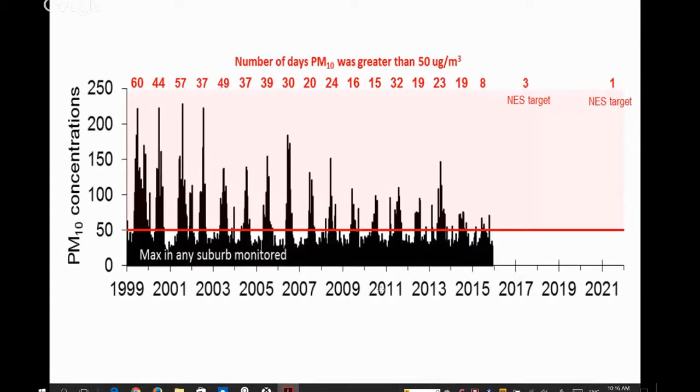There was a time when if you had a wood burner, the goal was to basically keep it burning 24 hours a day. So at night time you would load it up and shut it down to a virtual smolder, and you'd have these plumes of smoke exiting. The low emission burners essentially eliminated that option of the smolder, and they also introduced some technology to help clean that up, by increasing the combustion temperatures.

Low emission burners, as you saw in the graph, have been really successful in reducing PM10 concentrations, but LEBs are still subject to misuse and abuse by consumers. That's something important that the industry has been promoting - education for both the wood side and also the use. That's been embraced quite successfully by Nelson Regional Council and Environment Canterbury.

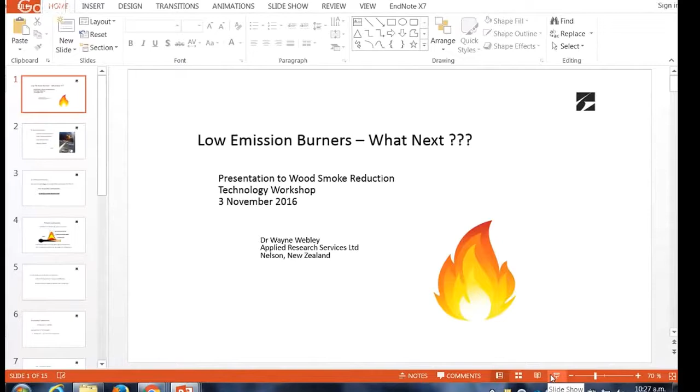I wasn't entirely sure how to pitch this or where to pitch it, so I've come up with some ideas which are hopefully provocative and informative about where you might go from where we are now with low emissions burners, if you lived in an ideal world.

Sorry, sir. Oh, okay. Thank you.

So I wanted to think about what an ideal wood burner would look like. What would we really be aiming for? It would be really great if there were no particulate emissions. Obviously, if you burn wood, it's going to emit carbon dioxide, water vapour, and hopefully nothing else.

My thought really is that there's no real reason why you can't produce a wood burner with no particulate emissions. It would be really nice if it had 100% efficiency - every bit of energy from the wood could actually be used to heat the room.

It would be nice if it produced a really even temperature. You put on an electric heater, you just get a nice even heat. If you put on a gas heater, you get a nice even heat. With most wood burners, you put a load of wood on the fire, and the room gets hotter and hotter, and then it cools off as that load goes away, so the heat goes up and down.

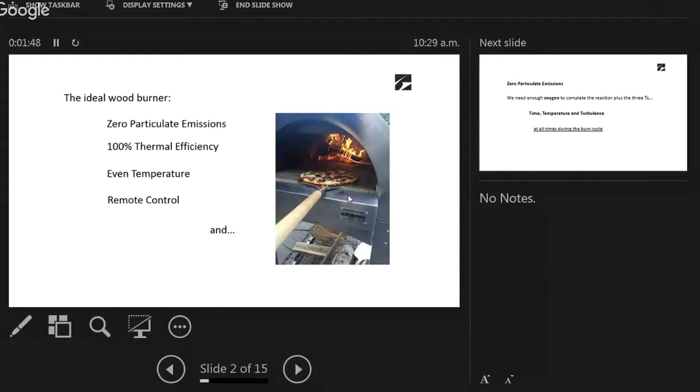I wanted to talk a little bit about the underlying theory of wood burners and how that might inform how we might approach actually producing an ideal wood burner.

So I started off with zero particulate emissions. We're thinking now about what do we need to drive the combustion to completion so that there's nothing left in those flue gases except carbon dioxide and water.

It's pretty simple. In a lot of ways, this stuff is not rocket science. You need enough oxygen. Basically, you're combining fuel with oxygen to produce carbon dioxide and water.

And you need the 3 T's. You need enough time for the reactions to go to completion. The higher the temperature, the faster the reactions go. And you need enough mixing and turbulence so that the fuel gases and the oxygen are well mixed. With those things, you can drive the reaction to completion and have zero particulates in what's going up the flue.

One of the key things, though, is that has to happen right throughout the burn cycle. So one of the problems with a lot of burners, for example at startup, or when you reload fuel, the firebox gets cold, things get out of kilter, and you suddenly produce lots of emissions.

So a lot of burners have an optimum or a sweet spot, and when they're operating there, everything's pretty good. But if you're away from that for any reason, if your operator does something bad, you suddenly start to produce emissions. So your ideal burner basically is able to have ideal conditions all the time.

So let's just think very quickly about wood combustion. I've basically divided it into what I've called primary combustion and secondary combustion. The terminology changes a little bit depending on where you're reading, so I'll talk about what that means.

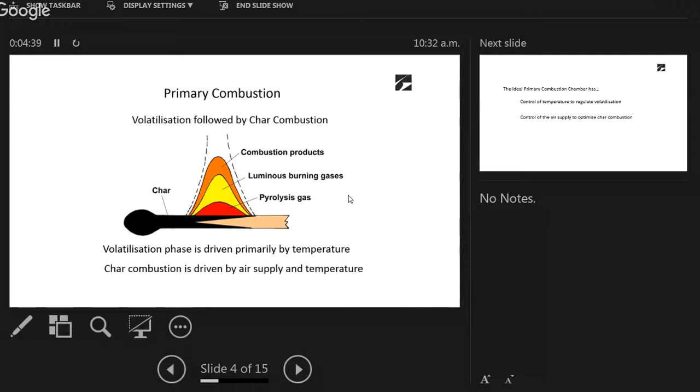So in order to get the volatilization under control, you need to be able to control the temperature in that primary combustion zone. When the volatilization is complete, you need to be able to control the temperature and deliver enough air to keep that glowing combustion of the char. If you don't, you start to produce carbon monoxide rather than carbon dioxide. You don't really want that either.

So basically, just to reiterate, you want to be able to control the temperature in the primary combustion area and the oxygen. The key thing about this in the ideal burner is you're controlling 2 things: temperature and oxygen. And that tells you a lot about what that ideal burner needs to look like.

So the secondary combustion is what happens to the combustible gases. They're just a complete hodgepodge of nasty chemicals that come off the wood into that secondary zone. And the secondary combustion is the process of burning those completely so there's nothing left.

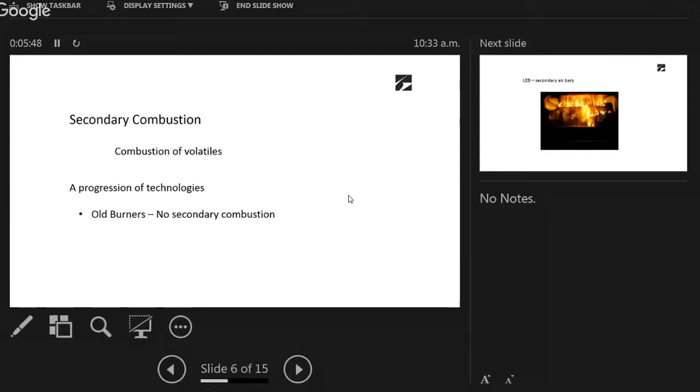I just wanted to talk a little bit about the technologies over the years. Essentially with the really old burners, there was no added technology to drive that secondary combustion. There was some flaming combustion that was really just driven by the heat from the embers, and a little bit of oxygen that came on the top. But a lot of the unburnt gases spilled over the top into the flues, and you got quite a lot of pollution. So the LEBs, the low emissions burners, basically the technology was to introduce air bars or secondary air, and you can see that in this picture.

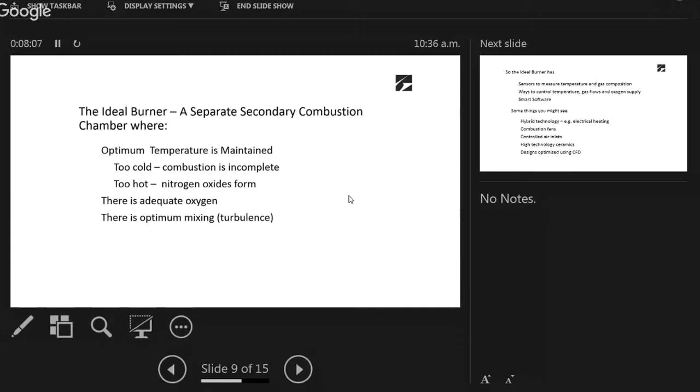So in the ideal burner, we'd have the secondary combustion chamber, but we'd have it held at an optimum temperature. If it's too cold, there isn't enough temperature there to drive the combustion to completion. But if it's too hot, you start to form nitrogen oxides and you create a whole lot of additional problems. So we don't want it too hot either. There's got to be adequate oxygen in there, and there's got to be optimum mixing. There's got to be really good turbulence.

So this kind of points to where the technology might head. And this is just my view. As I said, it's a little bit provocative.

I think we're looking at burners where there is really good sensor technology to measure what's going on, measuring the temperature and the gas composition. There are ways to actually control those things, some way to actually control the temperature, and that might be feeding some of the heat back, or it might be an additional heat source, like some electrical heating or some gas heating. I know people hate that concept, but I actually think that's not a bad way to go. And linking those sensors and the control of the air and the temperature is going to be some smart software. I think that opens up just a whole range of really nice things that we really should be doing with wood burners. Some things you might see: hybrid technology like wood plus electricity or wood plus gas.

You're likely to see combustion fans. So the difference, some heaters have fans now, but they just drive the air circulation around the outside of the firebox. A combustion fan is actually in the combustion path, controlling the flow of gases. Some controls on the air inlets to direct air to different places at different times. The use of high technology ceramics. And I think the designs of those combustion chambers would be optimized using things like computational fluid dynamics. So there's some potential there for some really nice research.

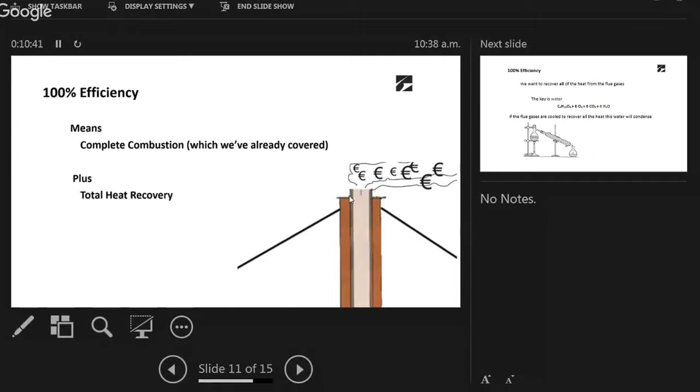If we're going to bring the temperature of those flue gases right down to ambient, the key is water. I want to talk briefly about where that water comes from. We know there's some moisture in the wood we burn, 16 to 20% moisture, and that comes from the sap. But it's also important to realise that the combustion process, the combustion of cellulosic materials combining with oxygen in the air, also produces water as a function of combustion. So there's two types of water there.

As you cool those flue gases down, that water is going to condense. It's just like the laboratory experiment you probably did at school, where you boiled something off, ran it through a condenser, cooled it down, and got droplets of water. So one reason people don't do this at the moment is because they have to deal with water in the flue if they cool the flue gases too much.

The other thing is that the heat in the flue gases creates a draft — it's actually what pulls the gases through the combustion system. So in the ideal heater, we have a condensing system. It's going to deal with the condensed water, and it's going to involve some kind of heat exchanger to pull that heat out. It might be a water coil or an air coil, but we're going to pull out that energy.

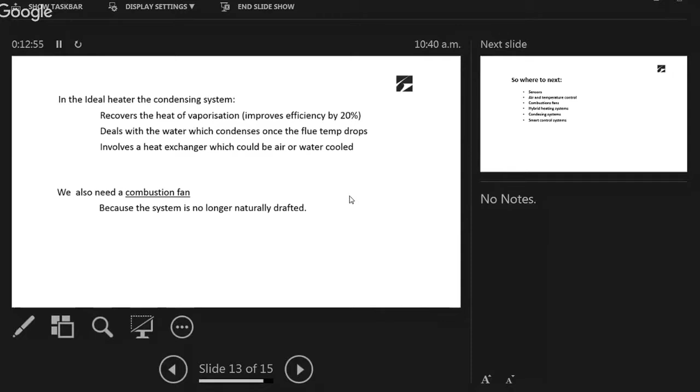These are done overseas on large-scale boiler systems. They're standard — there's no reason why we can't apply them, particularly to low emissions burners. And as I've already mentioned, if you don't have a flue draft from the temperature, you're going to have to put a combustion fan in there.

Okay, so just really quickly, if we're going to improve things, here are some of the things I think we need to put into place. We're going to have sensors. We're going to have control of temperatures, probably using some kind of hybrid heating. We're going to have control of air using air controls. We're going to have combustion fans. We're going to have condensing systems, and some kind of smart control that looks after the whole thing. And there are some other benefits of smart control.

If you're actually controlling the combustion process, suddenly you can make sure the heat is even. You can do what most heaters do, and that's sense the room temperature and control the output. So you can decide what temperature you want in the room, your smart control will deliver that, and you can have your remote control.

You might also see some automatic ignition systems. Wouldn't it be nice if you're heading home and you could push a button on your cell phone and the fire would be lit? You'd come home, everything would be nice and warm. Pretty much like I can do with my heat pump — I can turn it on before I leave Auckland, so the house is warm by the time I arrive back in Nelson.

You'll see web interfaces and smartphone apps. There's just a whole lot of cool things that you can do, as well as getting 100% efficiency and really clean burning.

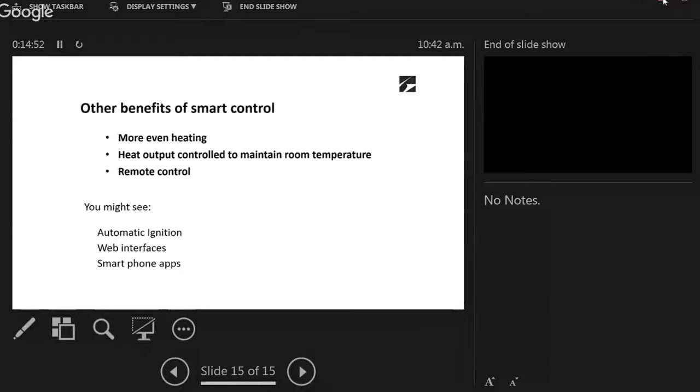I'm very happy to say that the technology generally does seem to be working, because we're getting quite a lot of online questions, which we'll come back to later on. But for now, let me make sure — have I got the right one? That's the right one, isn't it?

Why is that not coming up? Why is that not responding? That should work. Oh, it's just not coming up on there. Mysteries of technology. Technology, you see. Yes. Sorry.

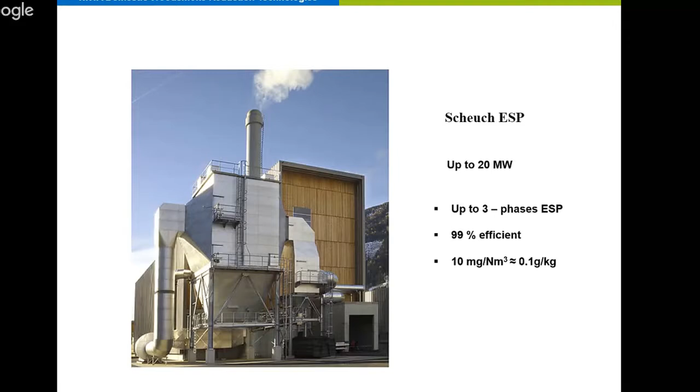My topic is electrostatic filters. Electrostatic filters is a technology which has been around for years and years for big plants, not small plants, like 20 megawatts.

But we want to talk about OekoTubes. That has been developed by a Swiss startup company in 2008. They started with that appliance, which can be retrofitted on every single tube, in every single location, even concrete or whatever, and takes the emissions out.

The results come with it - I want to show you some pictures. These guys now have 20 people involved, and 5 of them are only working on new technology, which is going to be here for the next 10 years. I can't tell you everything because some of it is pretty secret - that's what they're doing too.

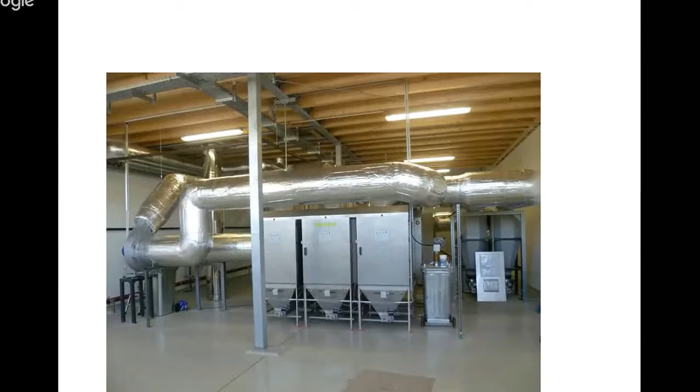But we're talking about OekoTubes. OekoTube - that's my house where I live. I put an OekoTube in. I have an old campfire from about 3 years ago, and I put that one up to get the things out. How does that work?

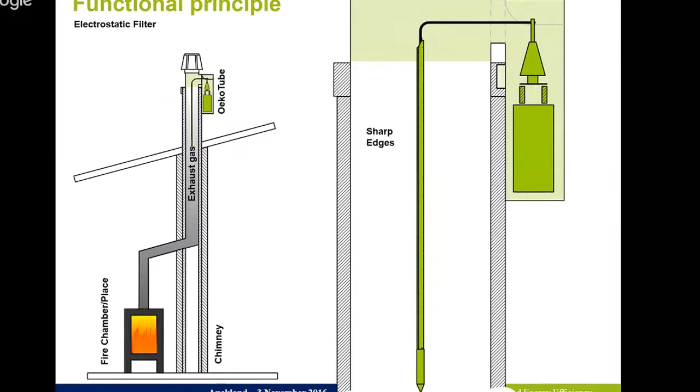Maybe you're familiar or not familiar with electrostatic filter things. You have a chimney here, the OekoTube is up here. You put an electrode - I brought something with me, it's an electrode - and then you have the tube as such. That's the high voltage, which we actually transfer from 240 volts, 30 volts, up to 30,000 volts.

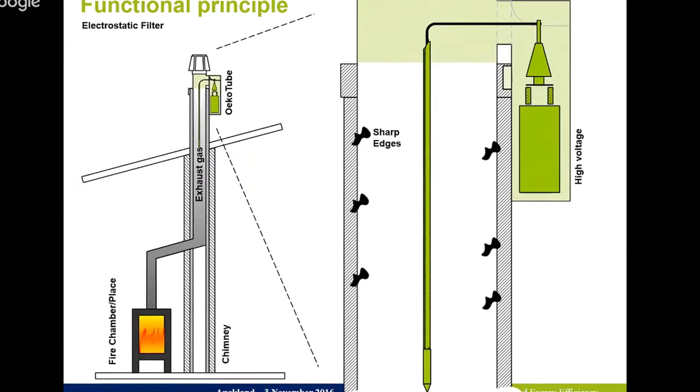Pictures say a lot. First I have some pictures and some tests which have been done in New Zealand when we were first involved, as well as international tests. And maybe if you have time, we can go through a cost-benefit analysis which shows the health benefit of cleaning up the air.

Well, that's a clean chimney - just keep that in mind, clean chimney. As you can see up here, that's the electrode. This goes down the center of the chimney, and then we create this electrostatic field. Just keep that in mind.

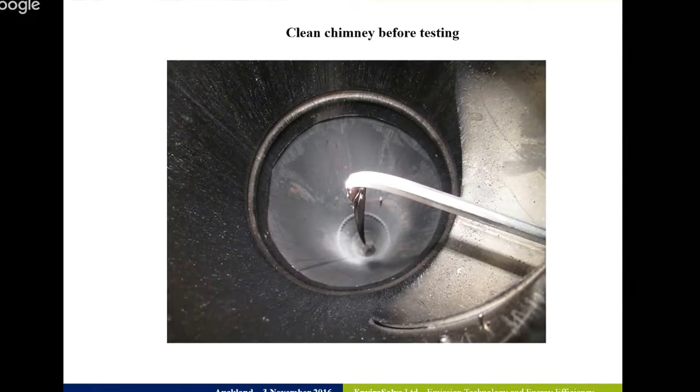The next one is a test we've done in Auckland, where I burned 22 kilos of fuel with no electrostatic filter. That's all the dust you get after 22 kilos.

Here, I put his finger there—it's a very, very thin layer. That's all it is after 22 kilos burning. And that could start hot burn, and thing as well.

Next one, that picture I took 14 minutes after start, and we burned 1.5 kilo of wood. You can see here all the dust already there, the dust which is so small. After that small little thing, we have about 2 mil dust already there. After 1.5 kilo, that's what it takes out.

Another one after 2 ¼ hours, and you can see here, that's very important as well. You can see here small little crevasses in there, which is what's happened. Some of that dust which already collected either went fall down or went up in the air, which is called re-entrainment, and they are big chunks—I'll show you afterwards.

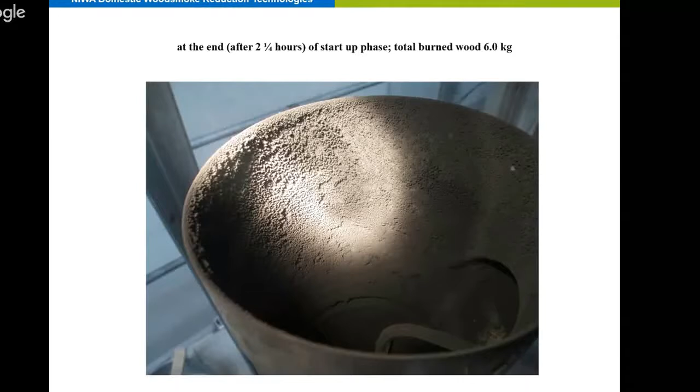That's one after 14 kilos. 14 kilos, that's the dust which we collect after 14 kilos. I put it up here at 1.6 meters. You see how much dust is there. It speaks for itself.

That's the re-entrainment, what they call it. We talked about these clumps, these small little flakes which can go up. The faster the velocities, the more of these big chunks go up into the air. But because they're so big, they don't affect your health, and they fall down roughly about a meter from the chimney. It's carbon, that's what's going there.

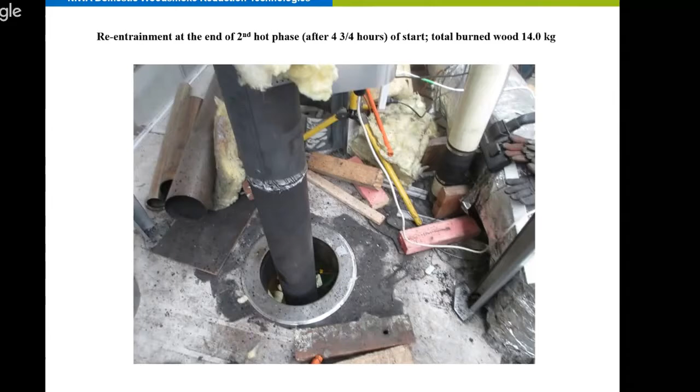That's when we finished, and you can see here all that big chunk, it fell down when the person down there shut the door to reload. All of a sudden, everything went down back in the box.

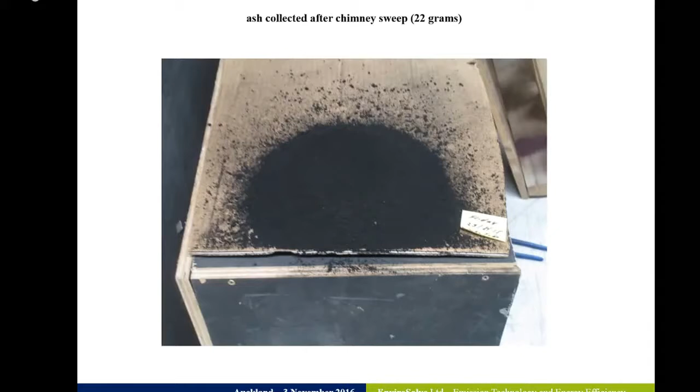That's the amount that he took out after finished, 22 grams. Now that's just to show you how much it is. That's not scientific or whatever—it's just to observe what's in the chimney we put out. That's nothing we can quantify.

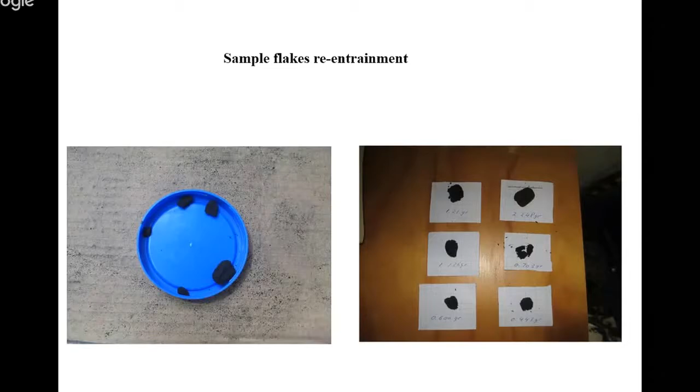That's the big chunk, shows the big chunk which came up here. The biggest one was 2.2 grams out of these nanometers, small little particles.

Testing, that's a big problem. When we do testing with the tunnel dilution method, some of these flakes go up, get sucked into the tunnel dilution and hit the filter, and then afterwards you weigh the filter, and your test result is absolutely gone out. You cannot actually say yes or no, and you will see that in the results what they have done—you can see negative actually efficiency. That's what's happened, and it's pretty big.

That's about one day—I put the thing here, that's about 2 mil high, and all in the middle it's sparked with this filter. And when they hit that filter, they get weighed, they spread around, and they get weighed afterwards. The result is that we have a negative result, which suggests it produces dust, which it doesn't.

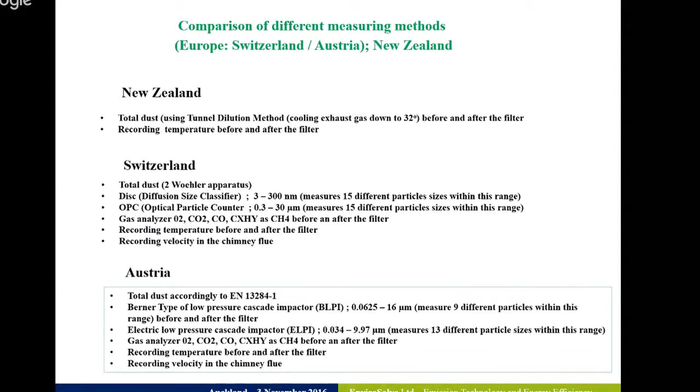When we talk about method, we have different methods in New Zealand. We have a tunnel dilution method, as Wayne knows. Switzerland have different methods to Austria, but the big difference—I'm not going through everything—is that the Swiss and Austrian people count particles in different ranges and different sizes. They do that with different methods, and that's a big difference. They don't only count one—you can see some of the discs have 15 different ranges, so you know exactly how big they are.

Now, what they've done so far—we started with Wayne back in 2014 with a big 28 kilowatt multi-fuel burner from Reefton, the main outlet from Reefton. He fueled it up and we measured. That was not really scientific, we just started and we see what's happening. And that was happening—that's your result.

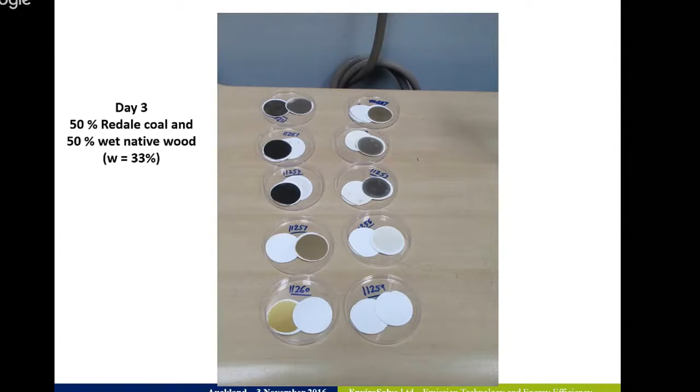We were approached by the West Coast Regional Council in the South Island, and I was concerned that when we put up these electrostatic filters, we'd get blockage because so much dust comes out. We monitored every 2 weeks, went up there, took pictures, measured the side to see how much dust was on the wall, because in Reefton they run big multi-fuel burners 24 hours non-stop for about 120 days, and I was really concerned it would clog.

But to my surprise, it doesn't block, it actually cleans itself. Everything falls down, but because they're real big burners, these big blocks and flakes come out, but they're not harmful anymore. After 6 weeks it looks like in a chimney.

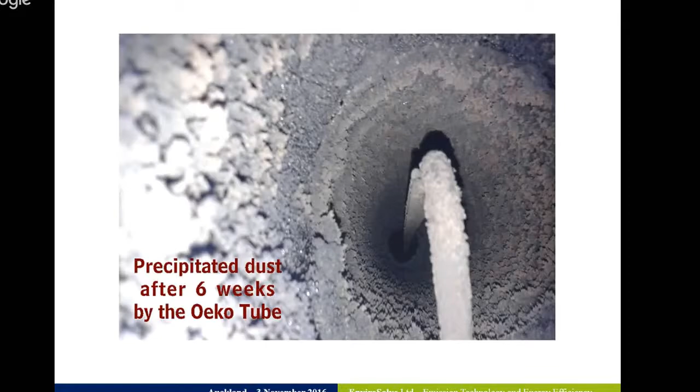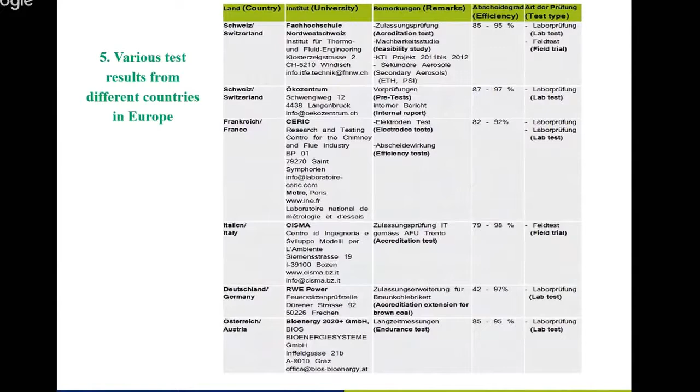There's one study where the Swiss tested the OekoTube for 2,000 hours without cleaning the OekoTube or the chimney. You can see with particles at 300 nanometers, even after 92 days and 2,000 hours, we're still performing well.

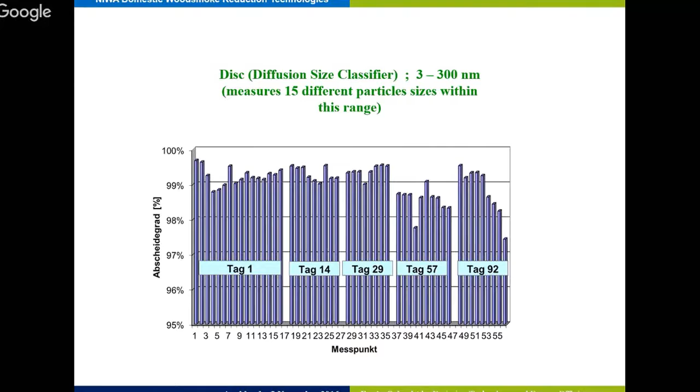They also measured the bigger particles, between 0.3 and 3 microns, and they were a bit lower but still well up in the 80s. That's all measured over 2,000 hours without cleaning.

Then the Austrians wanted more data, so they set up a lab test using pellets instead of wood, so they could control the fuel and what would happen. They took the extremes: high oxygen with low fuel, and really low oxygen.

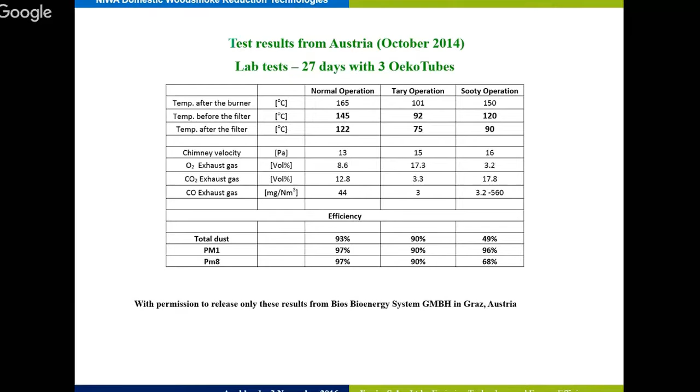They did 27 days of testing with 3 OekoTubes. As you can see, that one and the 49 result come back again to re-entrainment of flakes coming out. We still have really high efficiency, and they measured PM1 and PM8.

That was the first stage, and it took them 2 years to do. The next stage was the following, and this is brand new from the press, really - there's a scientific paper out there, with the whole report in German. They did this to bring it to the field.

They took 3 really old burners and put 1 or 2 OekoTubes on them. The OekoSolve people developed one called OekoTube Inside - it's gas tight and can go into a house. They also built in a way to fully automate cleaning mechanically if you want. It goes up to a 60 kilowatt boiler.

It's pretty amazing, really. They did two things: two seasons, each between 630 and 1,000 hours, and every 10 seconds they collected a full set of data. This was done at a university with all the years, manpower and resources - they just put a PhD student on it, and that's the actual result.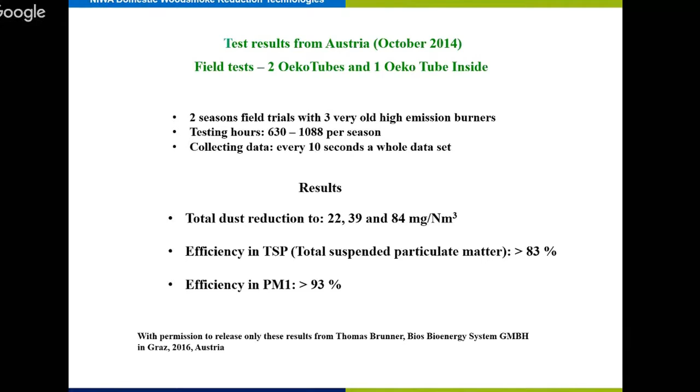Just to finish, because we have lots of air sheds, for the 1st of September 2016 we have a new law in place. Some of the airsheds are not allowed to have more than 3 exceedances. Some of them are really, really over the top, and nothing happened. I'm not sure what these councils are doing next year, because they're going to fail it. I won't talk about other emissions, but that's a discussion we have to have.

I've done a small calculation. This has nothing to do with scientists - I'm not a moralist, I'm not a statistics man. I took some figures together coming from HAPINZ, how much it costs a small town in New Zealand for health and social costs. These figures are from the March 2012 report, not from me.

I try to figure out how an OekoTube is going to affect these figures. I say, okay, we have a yearly cost of $11 million, not my figures. We put that OekoTube on, and only in the first 5 years, we get 5% reduction of health costs - that's not much, just 5%. After 5 years, no more increase or reduction, just leave it as is. At the end, if my figures are right, it's $35 million, and we can spend $4 million.

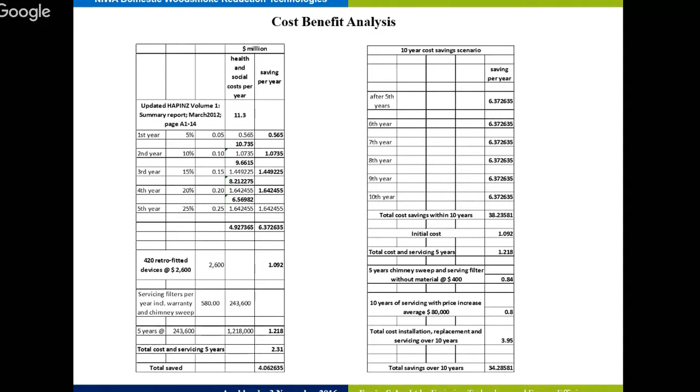Unfortunately, people with the money in hand don't see the real good things coming out of that. Conclusion: put your OekoTube back on. It was very, very efficient.

In Europe, it is mandatory - you have to sweep every year. And you look after the filter for 5 years. If you have this contract in place, we extend the warranty from 2 to 5 years. This OekoTube has a life expectancy of at least 10 years. That doesn't mean we're going to exclude other emission burners or other technology coming to market, but we can react very quickly.

That's about me. Thank you very much for your attention. If you have a question, thank you.

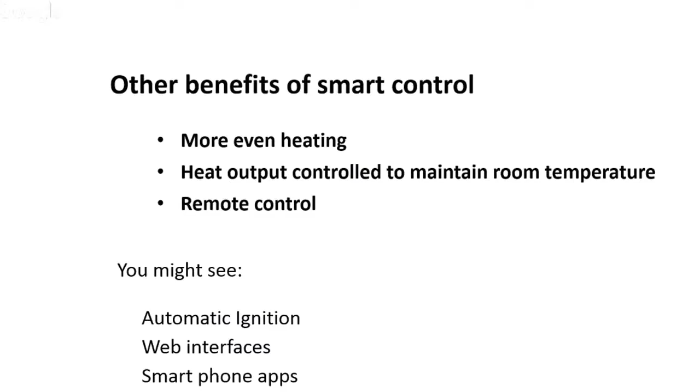Excellent, probably when I look afterwards. Thank you very much, Rene - very good food for thought there. At this point, just to keep to time, we're going to crack on, and I'm going to invite Jeff Blewett, formerly of this parish, now of Golder Associates - let me see if I can find the right one. Which one? That was yours. Have I done the same thing? Usually it's not made it come up on the screen. We're okay? Oh, you're not okay on that screen? You're okay here, okay. You right, Jeff?

Yeah, good morning everyone. Thanks for the invite to the workshop. As Ian alluded to, 5 years ago I left NIWA and went to Golder Associates, and my time at NIWA was very exciting because some of the projects I worked on involved real-life emissions from domestic burners. In my time as a consultant, I've been really fortunate to do a lot of work with ultra-low emission burners. So that's how I've ended up here today.

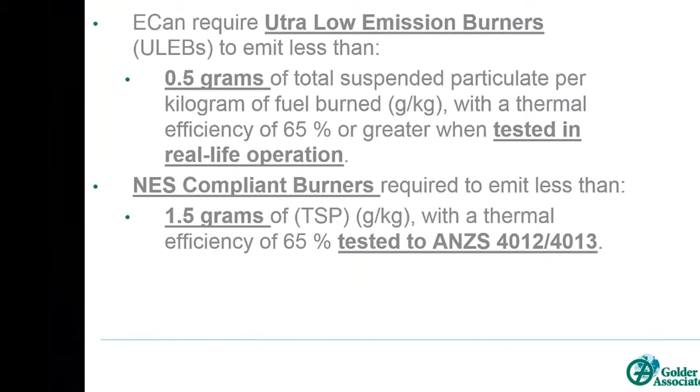So first of all, what is the definition of an ultra-low emission burner? I will apologize here, and I've apologized in our presentation - I didn't coordinate with Wayne, so there's a little overlap between the two of us, please forgive me for that.

So the definition of an ultra-low emission burner is 0.5 grams of TSP per kilogram of wood burned and an efficiency of 65%. That compares to the NES compliant burner, which is 1.5 grams and 65% efficiency. So there's two big differences there - one is the quantum of TSP allowed, the second is the test method that's applied to ULEBs.

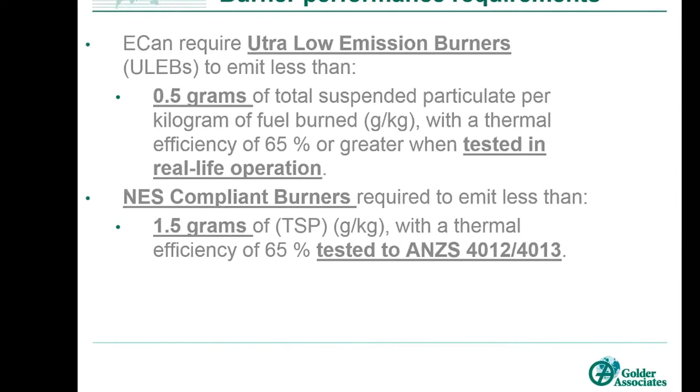I guess this is a Canterbury-centric presentation, because this is the definition that ECAN is using, and I believe it's similar to Nelson, but I'm not sure, because we don't have a national definition of ULEB - that may be coming up, I don't know. Anyway, so that's what a ULEB is. Now, for those of you who are interested, I'm going to do a little bit of combustion chemistry here - apologies to Wayne.

So, for those of you on the internet, what I'm holding in front of me is about a 1.5 kilogram hunk of Pinus radiata. It's a beautiful piece of firewood. Now, my 9-year-old son, who loves toilet humor, would say, what's brown and woody? And the implication is a piece of wood, and this is what this is.

But when I look at this, it's a beautifully engineered source of energy. It's a fuel tank full of volatiles you can burn. Once they've gone, you actually burn the container that contained them. It's just fantastic engineering. So let's put that in the context of the combustion chemistry.

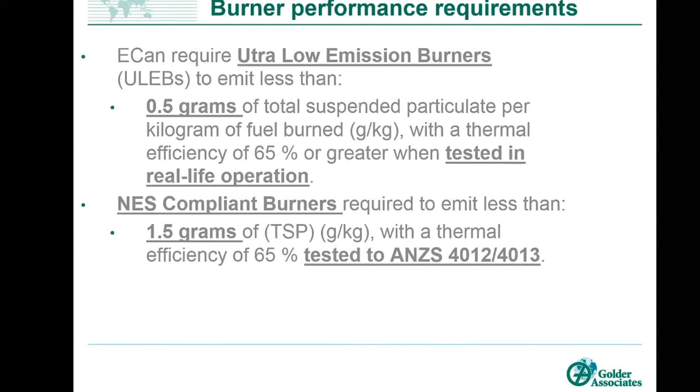Just a 101, there's two little slides here. Taking you through the process, when you light a fire, the first thing you have to do is deal with moisture - there's about 20% moisture in that chunk of wood, and before you can burn it, you want to dry that off. Once that's happened, the heat in the flame dries off the volatiles from the wood, which are burned. Once it's warm enough, the wood begins to decompose thermally, and that means the volatiles are driven off.

What happens next is that at about 280 degrees, it converts from solid to gases. The gases ignite at about 600 degrees. Now, one of the different terms we use here, I call it secondary combustion. Once those gases are released, you're left with the woody charcoal matrix, which is the charcoal. And at the end, when you get some oxygen on that, it begins to burn as well.

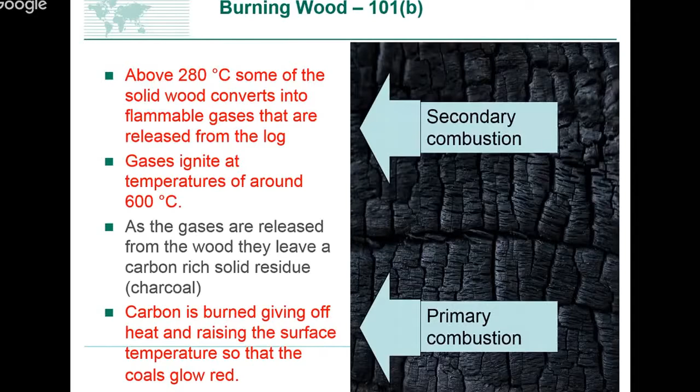So now this is important in the context of ULEBs, because as Richard showed earlier, in the LEBs, that combustion happens in one place. With the ULEBs, the engineers have been clever enough to separate those processes and provide conditions within which those two processes happen much more efficiently. So I've done some work on about five ULEBs.

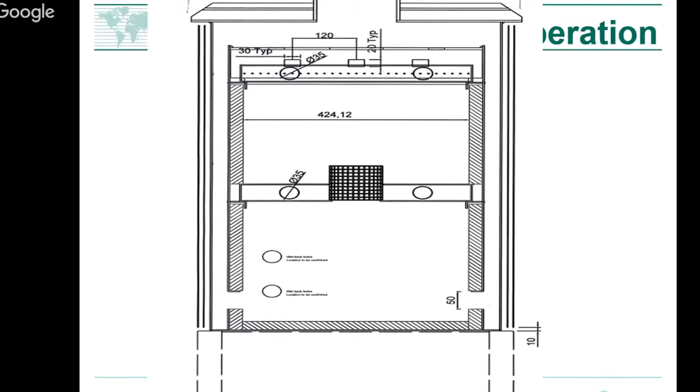It begins to light up and boil away. What happens is the combustion gases escape through that little hole and head up the flue. At this stage, what's happening is that the warm air rising in the flue is pulling air into that primary combustion chamber.

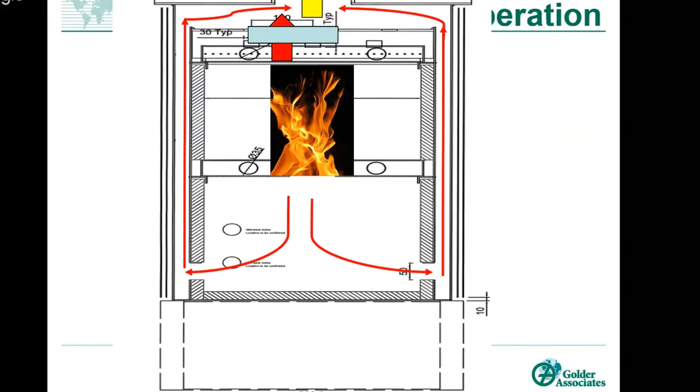Once things get hot enough, with the ULEB, we throw a barrier across the outlets to the primary combustion chamber. At that point, the air is then, due to the pull from the hot air going out the flue, drawn into the secondary combustion chamber, and in this particular model, you can see it go up the sides of the combustion chamber, through the gap at the top, and continue up the flue.

And at this point, what happens is we get that lovely - I love the term - dragon's tongue in the secondary combustion chamber. So that's how a ULEB works, and you're burning the charcoal at the top and the gases at the bottom. The conditions within each of those combustion chambers are designed to optimize, but not perfect, the combustion in the unit.

So here's a picture of a ULEB operating. You can see the interesting things are the color difference between the top chamber and the bottom chamber. The bottom chamber is getting close to 1,000 degrees in those gases. The top chamber is more like 600. You can see the difference between the red glow and the yellow-white light.

This is just a picture showing you the end of the burn cycle. It's interesting to have a look into the bottom chamber and see there's a little bit of ash in that secondary combustion chamber. Generally, instructions say you don't need to open that door to clean it out more than, say, once a month. You can see some normal ash collection at the top.

So the emission testing, now this is a critical difference between LEBs and ULEBs. The NES requirement is to do the Australia New Zealand standard 4013, and that is, as Richard has said before, was simply always intended just as a comparison between burners. It wasn't necessarily meant to reflect real life emissions.

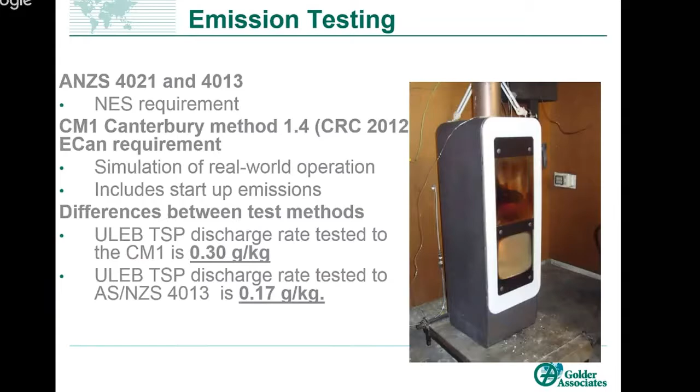So just a little idea, so what does this mean in real life? These calculations are not mine, they're taken directly from some ECAN documents. Essentially what we're showing here is the total daily emissions by type of burner. Clearly this isn't meant to be precise, it's indicative, so please just bear that in mind.

I guess the thing I'd like you to focus on, we've got the standard test method. We do a little adjustment to that to reflect real life conditions. We've got a good approximation about how much wood's used each day, and we end up with a total daily emissions of grams per day. You see that varies from 600 grams in open fires down to 21 grams per pellet burners. The interesting thing there is that I guess just ask you to focus on the complying burners, because they're coming in about 63 grams per day.

Just for anyone interested, I'm at home, I'm in that bottom row. I've got a pellet burner, which is brilliant. I do about 63 steps, and I drag up a 15 kilo bag of pellets every second or third day, depending on what time of winter it is. Great for heat, noisy as heck. Every heating system, you know. My wife says to me, 'Oh, can't you squeeze a ULEB, a discounted ULEB out of Renee?' So who knows, in the future we may have one for one of the other great ULEBs on the market.

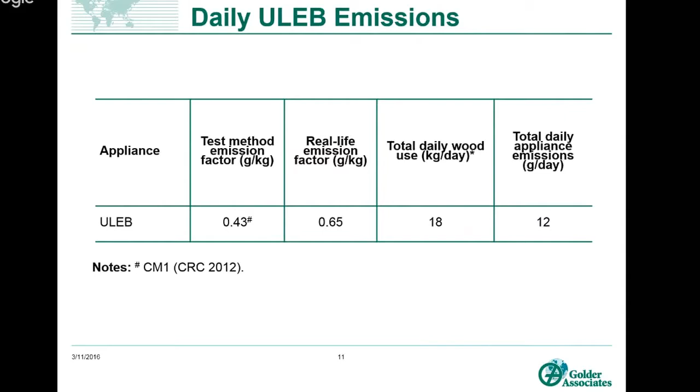Anyway, please just look at that compliant burner, 63 grams per day. We do a similar calculation for ULEB. So the appliance was 0.43 grams under CM1. Now, what we've done just to make it a relative test is we've added a safety factor of 50% to that, so we're using an emission factor of 0.65 and a wood use of about 18 kilograms a day. That gives us about 12 grams per day for the appliance. Now you think back, the compliant burner was 60, so this is a fifth of the amount that an NES compliant burner would use. Now, look, once again, it's not precise, it's indicative. What I'm trying to illustrate is that there is a big step forward here with this technology.

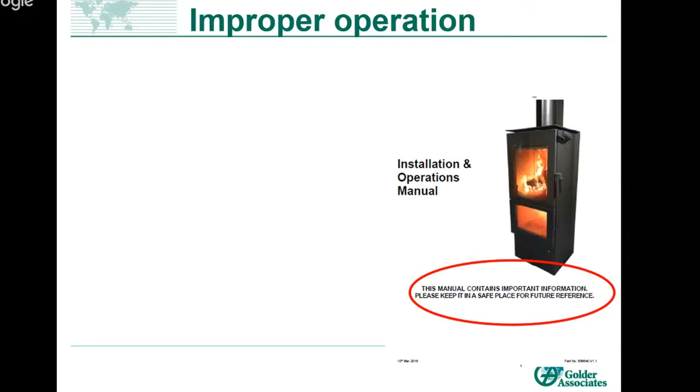Now, there's an issue with this: improper operation. All these ULEBs come with an installation and operations manual, and you'll notice all of them have this is vital information - store it with your passports and birth certificates - but whatever you do, stick to the rules. But what happens is for the ULEB to work, you've got to engage the damper or the bypass, which blocks off the direct route from the primary combustion chamber to the flue.

And it's great looking at these and seeing a variety of engineering solutions towards this. Rene mentioned that the Bionic has an automatic bimetallic strip that closes that for you no matter what you do. There's some cam action door drives, so when your door closes, the door, that goes across.

Other manufacturers have put a temperature gauge on the flues, and the instructions say when you get to this temperature, close the thing. There's a red, green, white LED on one model that says when it's green, close the door. And there's one that says just watch your watch, and after this much time, close it. So what happens if you don't close that thing?

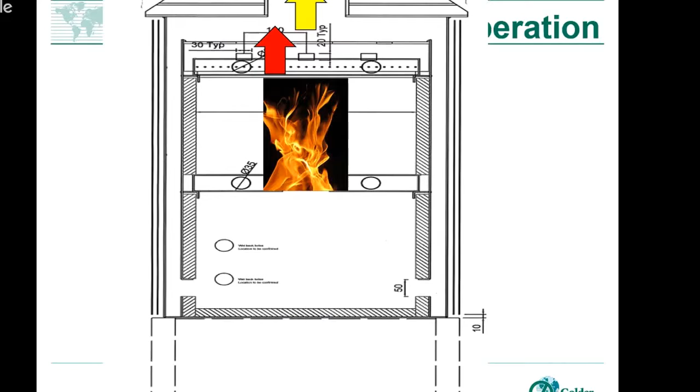You've got it burning away, the gases go up through that aperture and up the flue, nothing else changes. You don't necessarily engage the secondary combustion chamber. It's really interesting because some of them are designed so well that you get quite a bit of secondary combustion even before you engage it. But regardless, the question is, if you don't close it, what happens? Intuitively, the emissions performance will be lower, the emissions will go up, so it's a bit confusing.

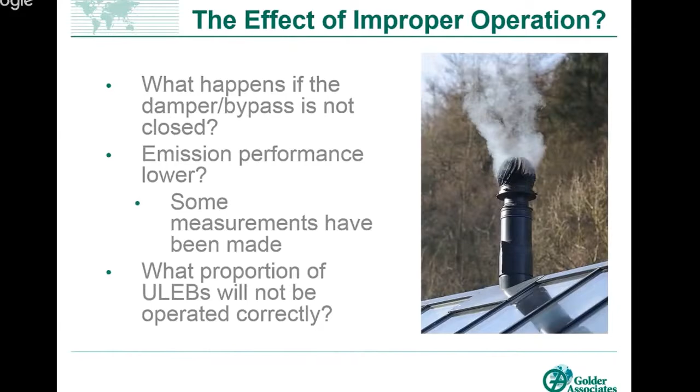So the question is, what does this mean for the management of emissions from this? How much of the population doesn't use them correctly? To be realistic, I guess I'm an optimist because I've got a whole drawer at home of manuals, I check them every year, make sure I'm still doing stuff. But what is it really trying to do? I can't fully answer that question, and I hope to get some comments about that later.

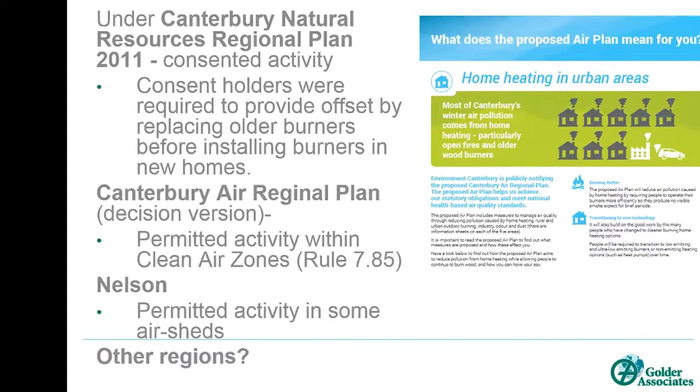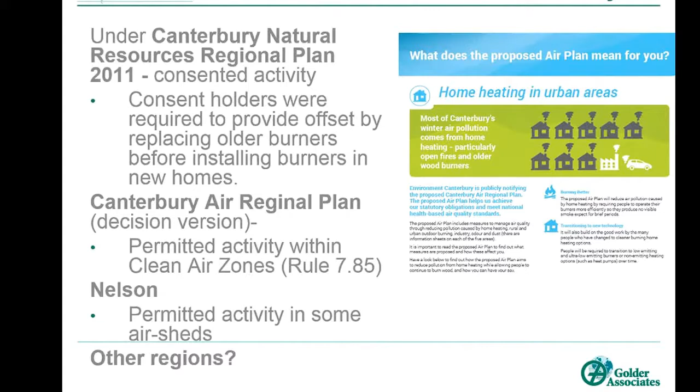So this is my last slide, I think. So the management of ULEBs across New Zealand. I got involved with ULEBs because in Canterbury, the previous plan, the Natural Resources Regional Plan, didn't allow any fires to be installed in new homes or homes without a burner already. So what the retail and manufacturing people had to do is get a consent by which they created a capacity or an offset in the airshed sufficient for them to install them in new houses. The way that was engineered was if you replaced a non-compliant burner, you created an equivalent of enough airspace for 5 new ULEBs.

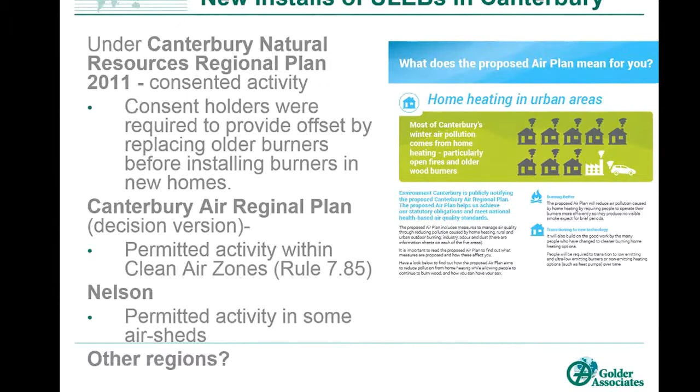But what we did was a bit of a trade-off. We said to Environment Canterbury, how about we replace one, we leave half the offset in the airshed for the benefit of the airshed, and we take up half the offset for new ULEBs. So that's generally how the consents work for Canterbury.

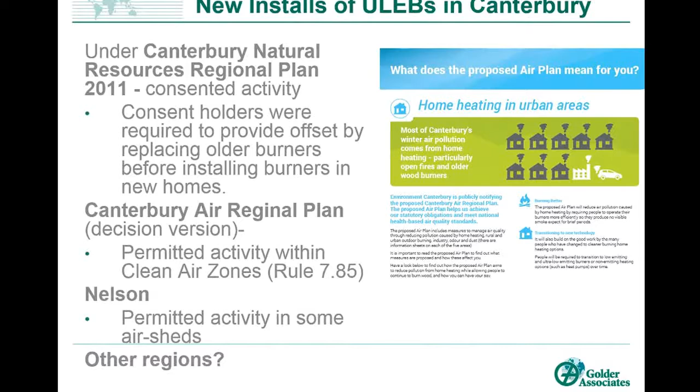But with the recent Canterbury Air Plan, in its decision version, it's subject to appeal, and there are some appeals, but I didn't see any appeals on this particular rule. Now ULEBs are a permitted activity within the airshed, so anyone can go and install one anywhere. And so, of course, I see Louise, you're thinking exactly, how does that work? Well, I'm sure the detail is essentially, I think you can only do a replacement install with a ULEB, and so as after 15 years those come out, you can calculate there's enough headspace that we actually had enough improvement without necessarily forcing the consent forward any further.

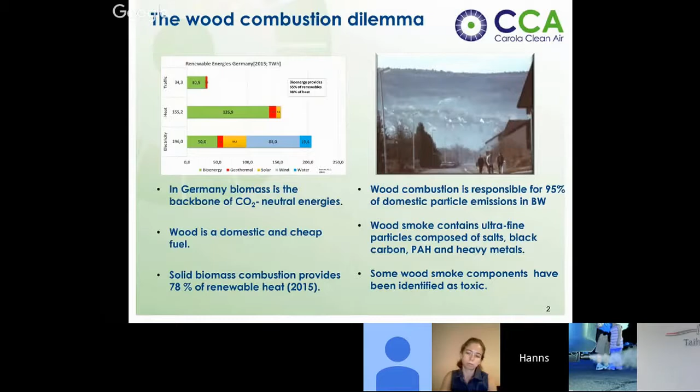So the wood combustion dilemma, I think, is well known in New Zealand, but it's also relevant in Germany. We have a great increase of renewable energies recently, but in general, biomass is the backbone of carbon dioxide neutral energies as it's used in traffic, heat, and electricity applications. Wood is a domestic and cheap fuel, and overall 78% of the renewable heat in Germany is supplied by solid biomass combustion.

On the downside of all this is that wood combustion is responsible, in the state where I'm coming from, Baden-Württemberg, for 95% of the domestic particle emissions. And of course, wood smoke contains ultrafine particles, which contain salts, black carbon, PAHs, heavy metals, and those have been identified as toxic. So there's a good reason to do something about this, and several attempts to solve the wood smoke dilemma have been started during recent years.

In Germany, we have a National Clean Air Ordinance, which requires 20 milligrams per cubic meter for boilers and 40 milligrams per cubic meter for stoves. Some cities in Germany and elsewhere start to regulate or even ban wood combustion in residential areas.

Our approach is to improve the technology. We've heard already about improving combustion technology, and of course improving fuel quality, and improving off-gas quality by filters is my topic. Just going slowly to the next slide.

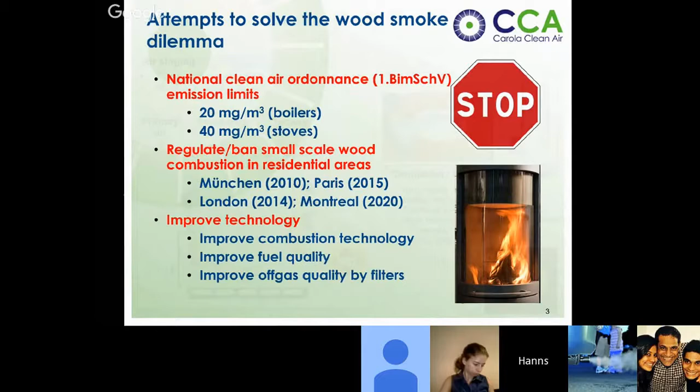We've heard already the tricks to reduce particle emissions from low emission burners. Similar technology applies to automatic boilers, which are in the range up to 1 megawatt in Germany. So primary, secondary, tertiary air, to achieve optimum mixing, to provide enough time for combustion and turbulence - this is the main idea. Our partner HTG Bavaria provides these boilers, and others are also in this field, with great success.

The second idea is, of course, to improve or sort the fuel quality - to use different qualities: premium quality, mixed quality, industrial and low quality. Those premium quality wood chips are usually burned in small boilers. Medium boilers will receive mixed qualities, and the industrial low quality will go to larger boilers which have better flue gas cleaning.

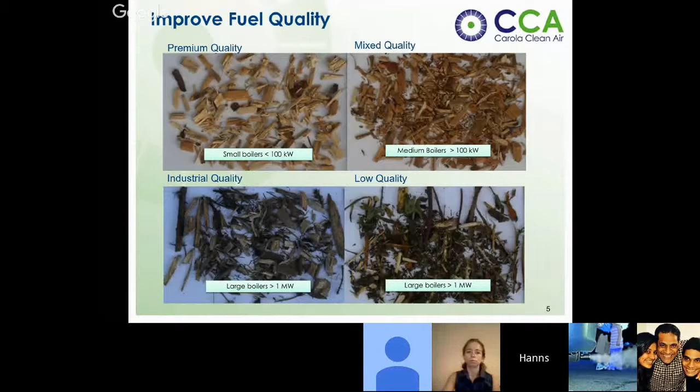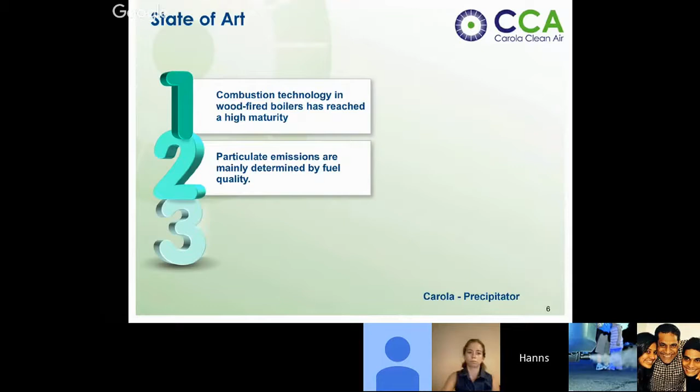So let's summarize state of the art. Right now, the combustion technology in wood-fired boilers has reached a very high maturity. The remaining particle emissions are mainly determined by fuel quality, and to achieve ultra-low particle emissions for wood-fired boilers, the installation of precipitators is required. For this we have developed the Carola precipitator, shown here.

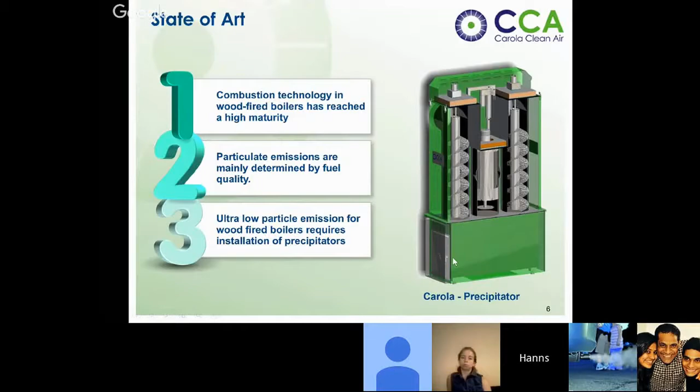In the Carola precipitator, the particles are charged by a corona discharge, similar to what has been shown previously by the Ökosolv group. These charged particles are then deposited on stainless steel brushes, and the particles agglomerate there on these brushes. By periodical turning of these brushes, particles fall down into an ash box, where they can be removed every 500 hours or so, depending on fuel qualities.

Of course, there are a large number of challenges for ESP development in wood combustion, and I don't want to run through all of them, but most have to do with variabilities of flow rates, operational parameters, variabilities of fuels, and discontinuous operation. Of course, such a precipitator should be durable, corrosion resistant, have low energy and resource requirements, and should be simple to use with low maintenance cost. On the other hand, it should not cost too much.

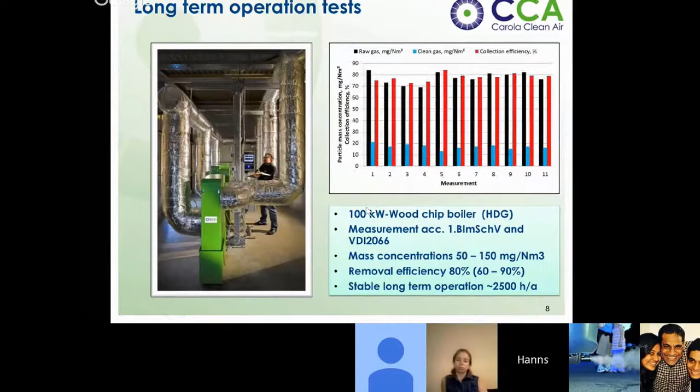So in order to achieve this, we have started long-term operation tests with this Carola precipitator, which I showed previously, in our test facility at Karlsruhe. The main result is that the efficiency is in the range of 60 to 90%. Efficiency is always the red column here, depending on the inlet concentration.

The facility is operated, cleaning the off-gas of a 100 kilowatt wood chip boiler. We measure according to VDI 2066, finding removal efficiencies in the range of 80%. Altogether, we were able to prove stable long-term operation of 2,500 hours with this setup.

The main problem, of course, is that removal efficiency depends on power consumption of the precipitator. An important aspect is to increase the power consumption up to a range of 30 to 40 watts in order to get good removal efficiency between 70 and 90%.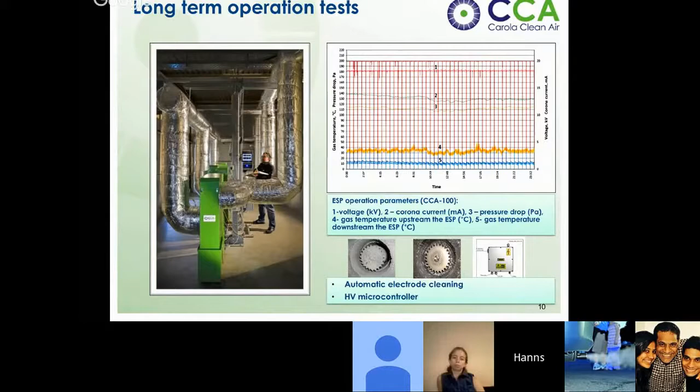So the trick is to clean the electrodes continuously by an automatic device and to control high voltage by a high voltage microcontroller. We have also adapted this precipitator to a modern grate boiler together with our partner HDG Bavaria.

In this device, the precipitator is included in the boiler, so it's integrated in the boiler, and all the precipitator functions are controlled by the boiler, even the ash removal system is integrated. So tests are continuing, and it looks very promising that this will become a product in the near future.

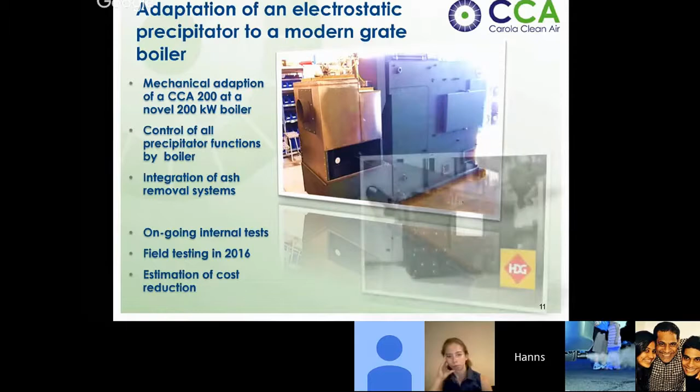Okay, so that's how it looks right now.

Meanwhile, we have started commercial operation at the Carola Clean Air company, and we have constructed precipitators for the size range from 25 up to 200 kilowatts.

All of them are designed by computer-aided design, and quality control is established. We assemble small series of these precipitators and have delivered already several units to boiler manufacturers.

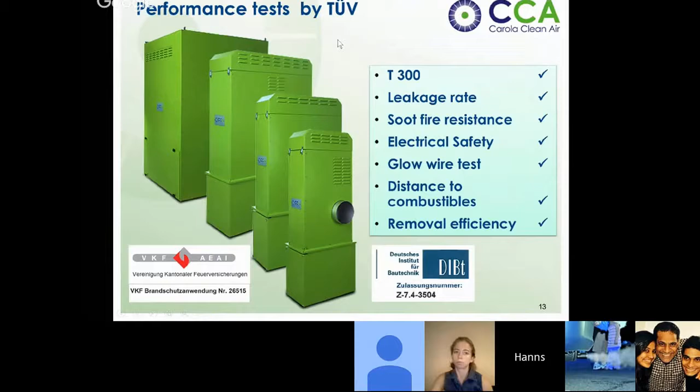Very important: if you want to sell such a unit in Germany, you have to run through extensive performance tests by TÜV, and in order to get the certification in Germany by the German Institute of Bautechnik, and we have received these certifications beginning of 2016.

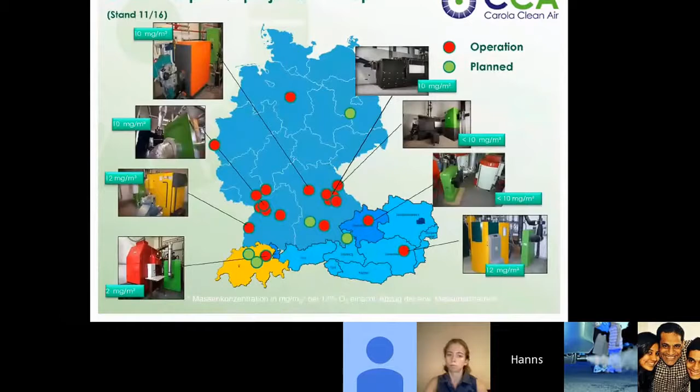We have also a certification in Switzerland. Meanwhile, we have started to run field tests, and of course some commercial units are already in operation.

This also shows locations where the precipitator is in operation in Germany, southern Germany, Austria, and Switzerland. Altogether, as you can see, in most cases the results are very promising. Most of the time we achieve emissions below 10 milligrams per cubic meter and achieve the current standard.

Especially interesting is this application to a pellet burner, which I will show in the next slides. This shows one result of a 200 kilowatt boiler. The inlet concentration is between 30 and 50 milligrams per cubic meter.

Outlet concentration most of the time is in the range of 10 milligrams or even below, so very good performance in this field test. That's an installation shown in Bavaria.

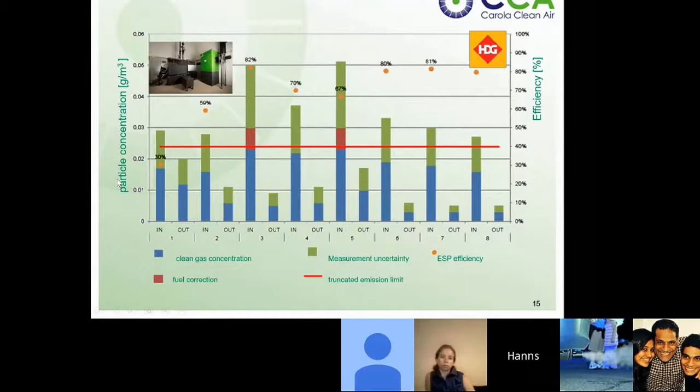So if you summarize the particle emissions of wood-fired boilers in test installations over the last 5 years or so: in 2012, classic wood-fired wood chip boilers had emissions between 20 and 100 milligrams, while pellet boilers were in the range of 20 to 30 milligrams.

Meanwhile, modern wood chip boilers have reduced their emissions significantly, and by using electrostatic precipitators, they come into a range between 10 to 20 milligrams for wood chip boilers and 1 to 5 milligrams for pellet boilers. So we are close to the particle emissions from oil and gas-fired boilers.

This is shown here for the ultra clean wood combustion, which we have started together with a Swiss company. The boiler is 160 kilowatts, which includes a precipitator running at 20 kilovolts.

The fuel is wood pellets, and upstream this very sophisticated boiler has 10 to 11 milligrams, while downstream it may go down to 1 milligram, with a maximum of 5 milligrams.

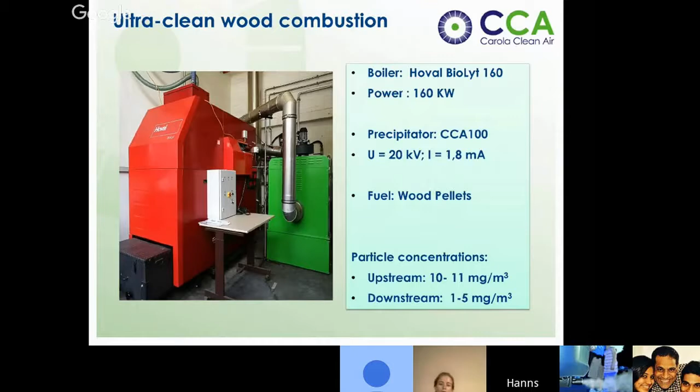So of course these highly sophisticated boilers have very small particles, so it's more difficult to precipitate them.

Let me summarize: we have collection efficiencies of about 80%. We reach the emission limit and have emissions lower than 20 milligrams.

Meanwhile, almost 30,000 hours of long-term operation, certification by German authorities, and the sale and production has started. Thank you.

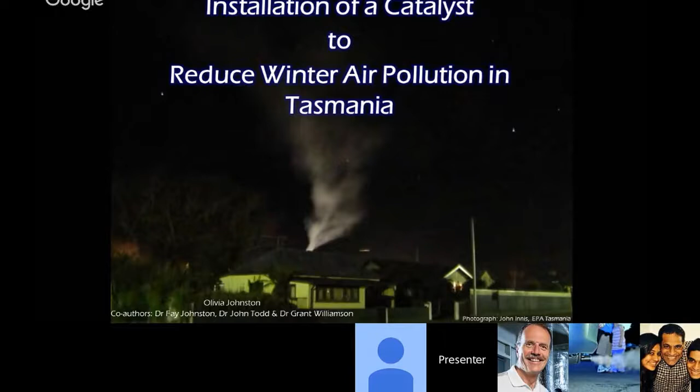Hi everybody, my name's Olivia. I recently, about 2 years ago, did an honours project at the end of my university studies in Tasmania. So this is what I'm presenting today, back to that study, which was aimed at reducing air pollution generated from wood smoke in a rural community in the north of the state, Perth.

For those who aren't aware, Tasmania is in the southeast of Australia, it's the island state, but a relatively cold climate, and so wood burning is very popular in that place as well.

The study was using a catalyst which is commercially available in Australia called SmartBurn. Before the study, there was no literature about whether SmartBurn does reduce pollution from domestic wood heaters, so it was the first study that actually quantified that effect.

Before then, there were just some reports made by the manufacturer that it reduces particulate matter generated from individual wood heaters, sort of in laboratory settings, so the data was very limited.

As you all know, wood smoke is harmful to health, so there are some respiratory and cardiovascular effects associated with exposure. This study measured and aimed at reducing PM2.5, so fine particles up to 2.5 micrometers in diameter.

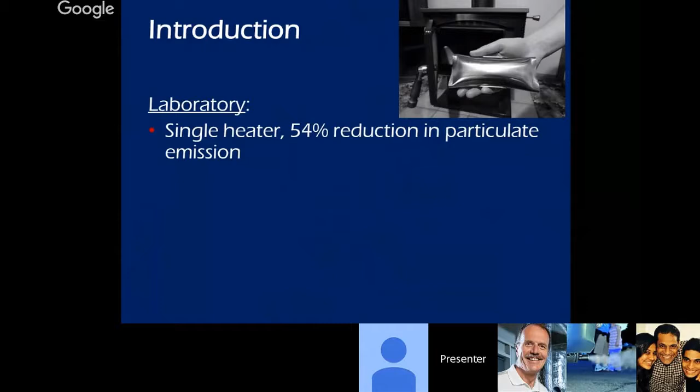As I mentioned earlier, prior to my study being conducted, the only data was reports made from the manufacturer of SmartBurn, and they stated that the device reduces particulate emissions by up to 54% in single heaters in laboratory settings, so controlled conditions.

There was also one field study done in Armidale, New South Wales, to test SmartBurn. It was tested again in single heaters, and it was a qualitative study, so it was actually measured by the size of smoke plumes generated from single heaters, rather than actually measuring emission concentrations in the air.

The study was unique in that it actually quantified ambient pollution and determined the influence of SmartBurn upon it. The aim was to determine if SmartBurn influences ambient air quality, focusing on Perth, and also implies that the post-intervention pollution levels, or PM concentration levels, in Perth would be reduced compared to the pre-intervention winter and compared to control communities.

So the pre-intervention winter was May to September in 2013, and then the post-intervention period was from July 1st to the end of September in 2014, right after the study had been rolled out in the community.

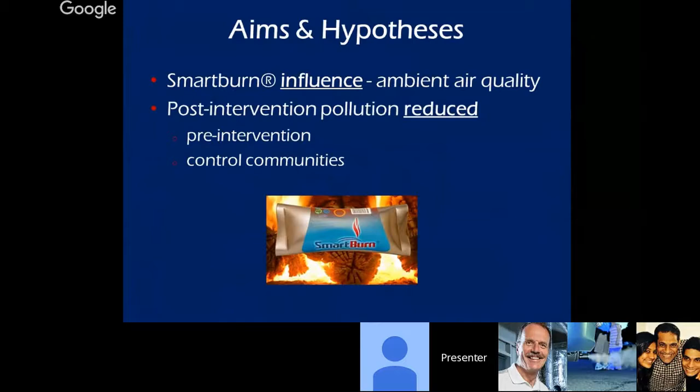How the section was carried out can be divided into 4 steps. The first stage was actually distributing the catalysts, the SmartBurn devices, to all wood heater houses of Perth. This was done one weekend in June, where volunteers were on foot, door knocking and offering the catalyst for free for them to use in their wood heater for that winter period of 2014.

The catalysts were actually donated from SmartBurn Australia, so they donated about 600 of them to us to carry this out.

The second stage was the ambient air sampling. The Environment Protection Authority of Tasmania has a blanket network, which is a distribution of 29 fixed ambient air monitoring stations, looking like the image there on the right, with 29 locations throughout Tasmania.

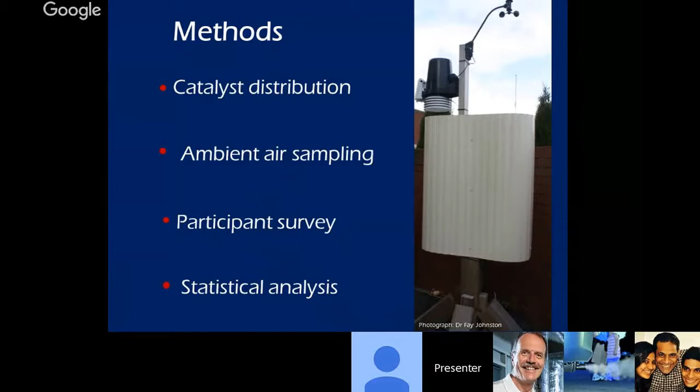The final stage is the statistical analysis. Basically, to see if there was influence, first a general additive model was conducted to eliminate any variation in PM2.5 concentrations that may have been attributed to changes in weather conditions occurring every day and every hour. Then the residual PM2.5 values for each town were used to generate a general linear model, which determined if there was an interaction between intervention phase and location - if there was actually a significant reduction to PM2.5 concentrations post-intervention, especially in Perth, where the catalyst trial was actually conducted.

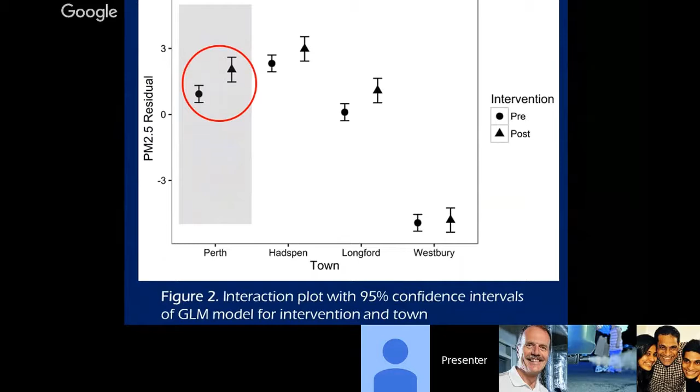The results show that there are some differences between each town in the mean PM2.5 concentration, but there was no significant decline during the intervention period, especially in Perth. We see that the towns, while quite different to each other, there's nothing that shows the catalyst trial in Perth actually caused a reduction to pollution.

There are various reasons for this. So the results don't support the hypothesis. There are many reasons for it. Perhaps the most polluting households weren't actually targeted by the study. So the 20% of houses that didn't receive a device and use a wood heater may have been contributing the most to the pollution in Perth, and perhaps they were closer to the air monitoring station, and so they ended up sort of blocking out any effect that the intervention actually did have in the town.

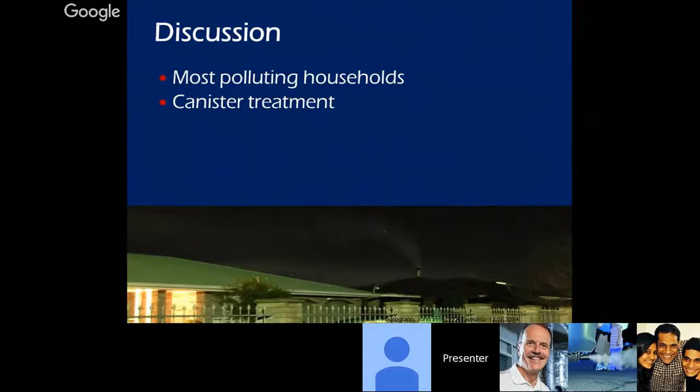The participant survey did reveal that the canister treatment, as prescribed on the box of the product, wasn't met by all participants. On the SmartBurn device box, it states that the canister must be elevated and level in the firebox and kept away from direct heat. There's a few special things that have to be achieved in order for it to work.

And secondly, the combustion conditions - the temperature of the fire, aeration. How the catalyst actually works is: it's a steel canister with a solid mixture inside. When it's sat in the firebox, the heat from the fire vaporizes that solid mixture, and it escapes out of the open end of the canister to act on the early byproducts of combustion, ultimately reducing the energy required to ignite soot and gases in the firebox. That's claimed to actually clear the flue and clear the glass door of soot.

But there are ideal conditions for that. Perhaps if participants were operating the heaters at a quite low rate, smouldering combustion, the temperatures may not have actually reached the threshold required to vaporize the mixture, so it might have been sitting there dormant for most of the time they were using the heater. On the other side, perhaps if people were using their heaters on that fast rate setting, quite high temperatures, they would have vaporized the entire contents of the canister prior to the end of winter, since they're supposed to last about 3 months.